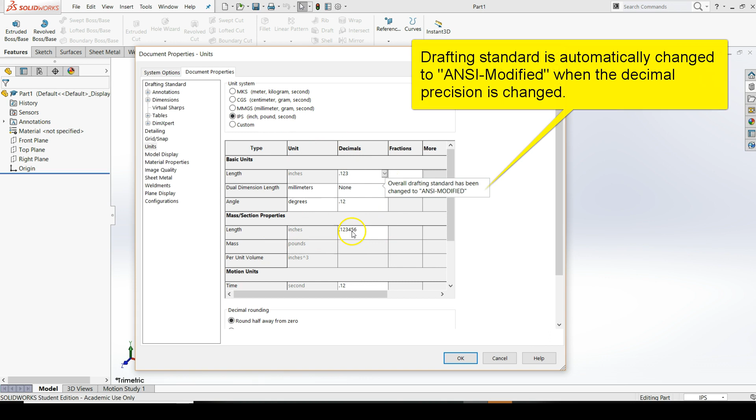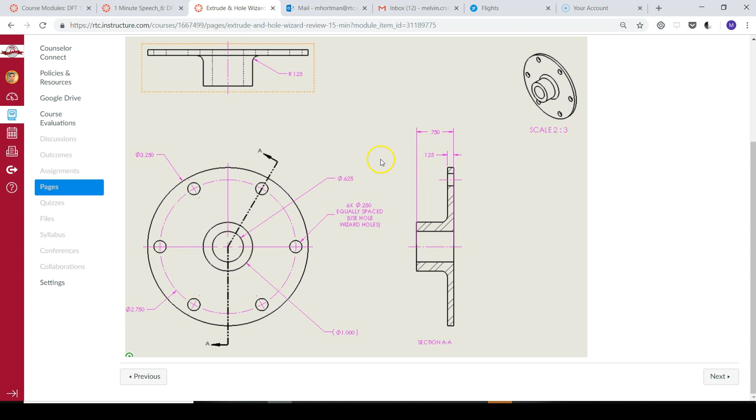And the mass properties, that can be way out to 6 decimal places because that's for doing mass and things like that. And I'm going to have ANSI modified. So I'll press OK and then start sketching on the right plane. Because if we remember from our demonstration previously, how we work with Revolve boss bases is we start with the cross section and we're going to sketch out the top half of the cross section and then revolve it 360 degrees to get the cylindrical part, or at least the majority of the cylindrical part.

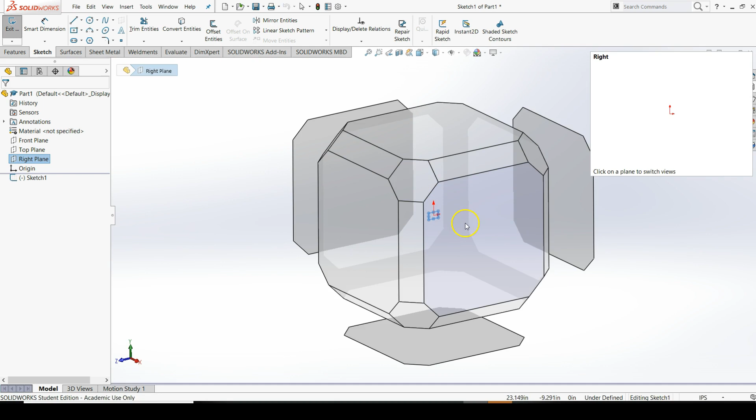So I'm going to go back to SolidWorks and sketch on the right plane. Click on the right plane, I get my quick access toolbar and I can hit sketch here. If SolidWorks didn't automatically make you normal to the right plane, you can go up to the view toolbar, click on the view cube, and then click on the face that is going to put you normal to the right plane.

Now the first thing I'm going to do is create a center line, and instead of drawing it from the center point, I'm just going to draw it out here in space because something weird happens when we create an infinite center line. It gets rid of all relations. So I have my center line. I'm going to click on it to highlight it, go over to the property manager, and then click the box that says infinite length. And then what I'll do is I'll go up to the add relation button, which is in the command manager of the sketch tab. In the drop down where it says display delete relations, I'm going to go to add relation.

My line 1, my center line, is already selected in the selected entities because when I had clicked on add relation, this center line was already selected. So now all I have to do is click on the origin point and then say to make them coincident to each other. Click the check mark, click somewhere out in space to see that my center line is now fully defined.

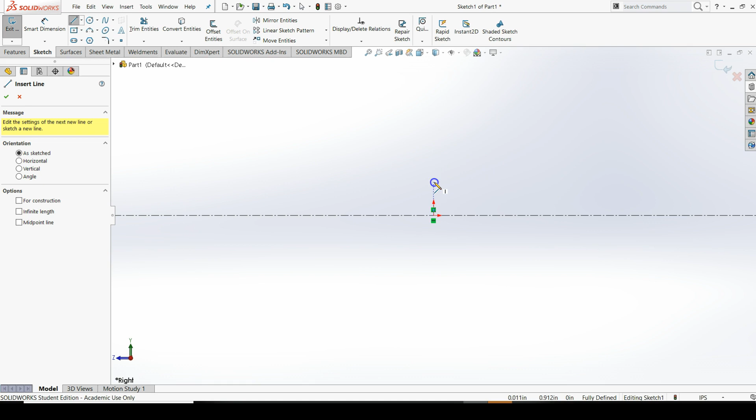Now I'm going to sketch the profile, and this is just going to be a rough profile. It doesn't have to be exact because remember with SolidWorks, in our sketches, what we do is we create a rough sketch and then add the dimensions, add the constraints later so that our sketch becomes fully defined. So I'll start out with creating a vertical line that's vertical with the origin. But remember, it's not on the origin, it's just above the origin because this part does have a hole in it, so we want to model that into our sketch. So I have a rough sketch of what the top portion of my cross section is going to look like. Now I can start adding smart dimensions with the smart dimension tool.

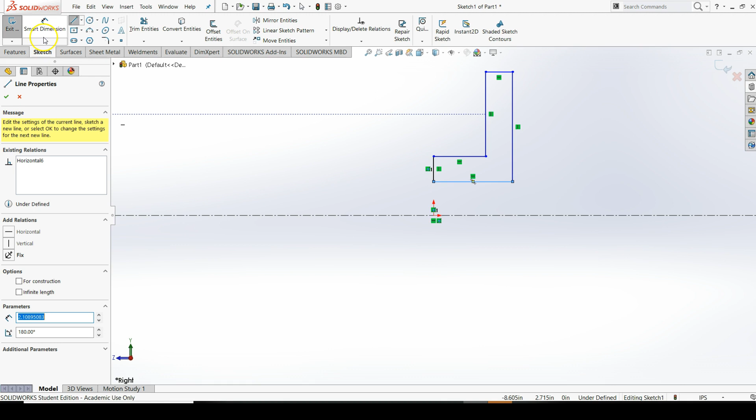The first dimension I'll add is this diameter. I know you all remember from AutoCAD that we would originally have to apply radius dimensions, doing the math from a drawing that listed all of these circular measurements as diameters.

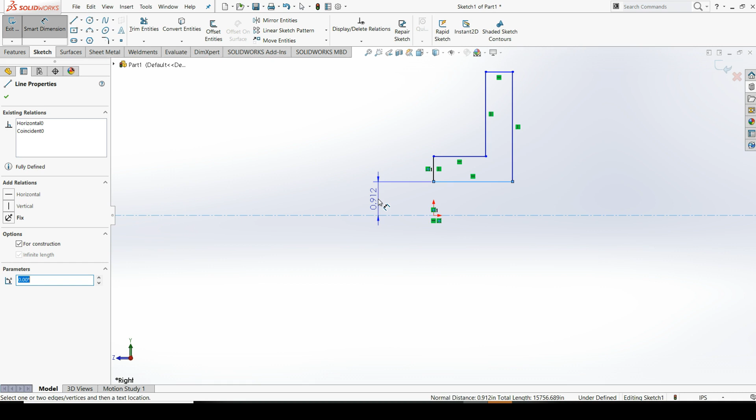Well, not in SOLIDWORKS. SOLIDWORKS has this smart feature where if I bring my cursor below the center line, it will automatically assume that I'm going to be placing a diameter. This is because SOLIDWORKS knows that it is capable of doing the Revolve Boss Base feature, and that when I do the Revolve Boss Base feature, I'm going to be sketching something that's going to end up being cylindrical, so I probably want to apply some diameter dimensions.

So above the center line, I can apply a radius if need be, but more often I'm going to need to apply a diameter. So I just pull my cursor down below the center line to click to specify the diameter of 0.625. Then I'll do the same thing for the top line. And notice I click the top line and it automatically put me into a diameter dimension.

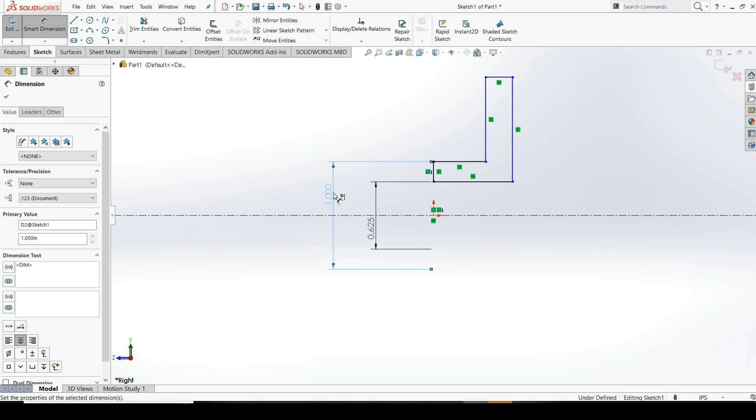Usually with Revolve Boss Base features, you not only have one diameter, but you have a bunch of diameters that you want to place on your sketch. So SOLIDWORKS is, in a very smart way, guessing that I want to place another diameter, allowing me to place a diameter without having to click on the center line, nor go below the center line. So I will apply this dimension of 1. I'll apply the top dimension of 3.25.

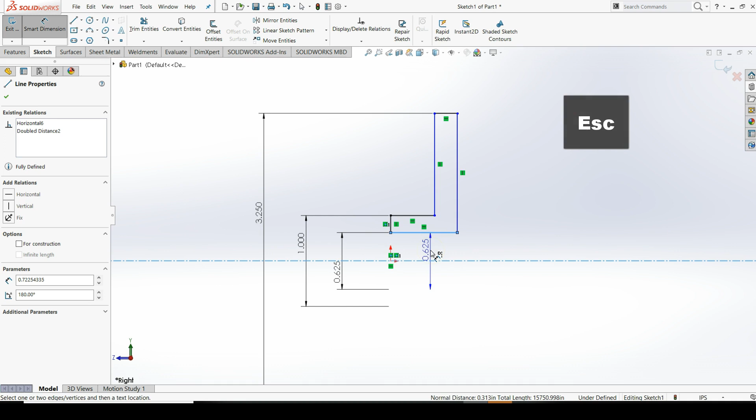I'll zoom out a bit with my mouse wheel so that I can see a bit better. I require a 0.75 dimension for this bottom line, but see how it automatically placed me in a diameter dimension? To get out of the diameter dimension to apply a thickness, I press Escape on my keyboard. So now I can place this thickness dimension of 0.75. And same thing goes for this top thickness of 0.125. And now my sketch is fully defined.

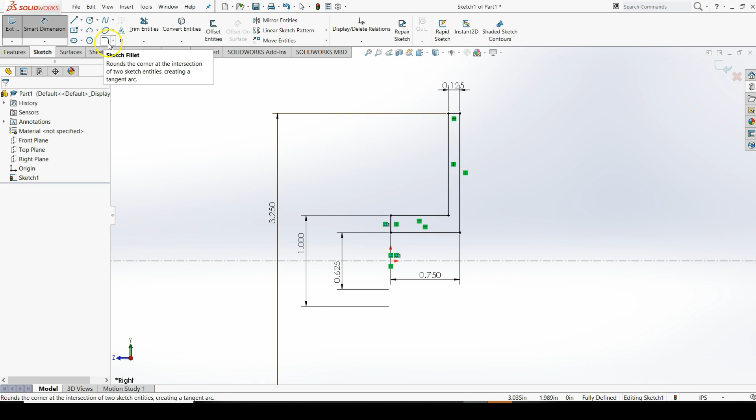If I wanted to, I can put my fillet in right here as well, but there's no harm done putting the fillet in as a fillet feature. I'm going to put the fillet in right now just to make less features for myself. So I'll go to Sketch Fillet, which is on the Sketch tab of the Command Manager. Click my corner that I want to fillet, which is a point in this case. Set the radius to 0.125 because I believe that's what it is.

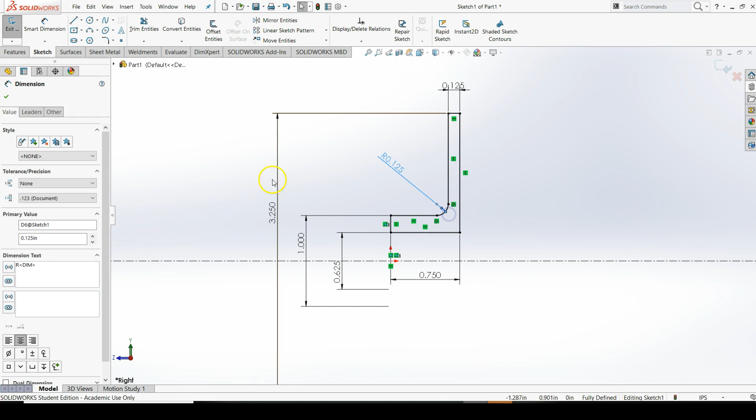Press the green check mark to confirm this size of the fillet, and then press the green check mark to confirm that there are no more fillets to be added. My sketch is fully defined. I'm ready to go. So I'll go up to the Features tab in the Command Manager, and I'll go to Revolve Boss Base.

Automatically SOLIDWORKS knows that the only center line in my sketch is going to be the axis of revolution. You can look in the Property Manager for the Revolve feature that the axis of revolution is automatically selected as Line1. Now if I had more than one center line inside my sketch, SOLIDWORKS would ask me which center line I want to be my axis of revolution. Note that you can also click solid lines to be your axis of revolution.

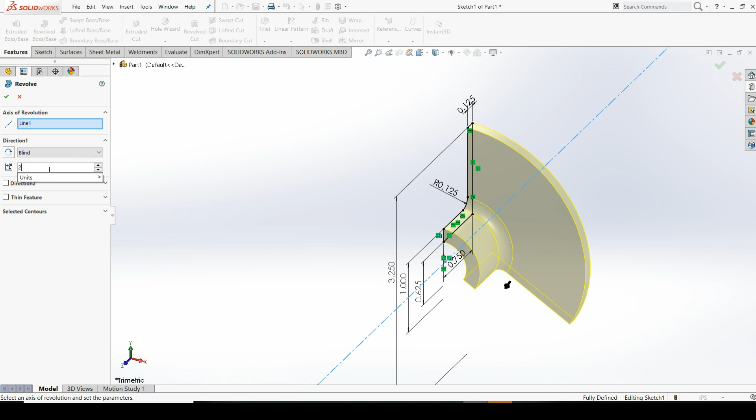I can also change the amount of angle that my sketch is going to be revolved. For this case we want 360, but imagine if I wanted 180. I could easily type that in. Or 120. Or 270. I could easily type that in to make some pretty complex geometry.

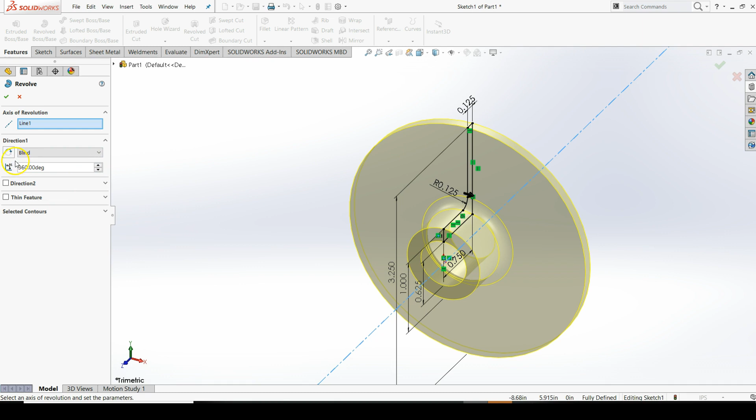SOLIDWORKS allows us to do these things very quickly and efficiently with the Revolve Boss Base feature. I'm going to put my value of 360 degrees back in because that's what I want. So I press the green check mark to confirm, and now all that's left is to do those holes.